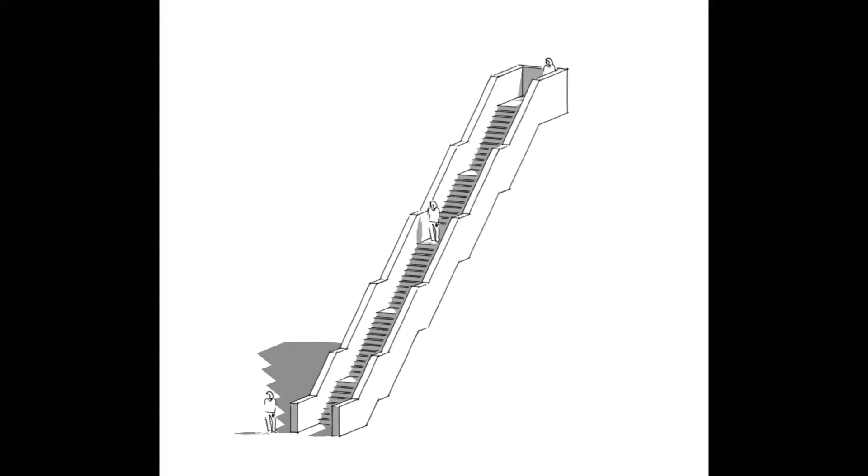So this is a statics case study revolving around finding an equivalent force couple system. This is the Vlooyberg Tower in Belgium. It was constructed in 2015, and it was built to provide a unique platform to give visitors a view of the town and surrounding forest.

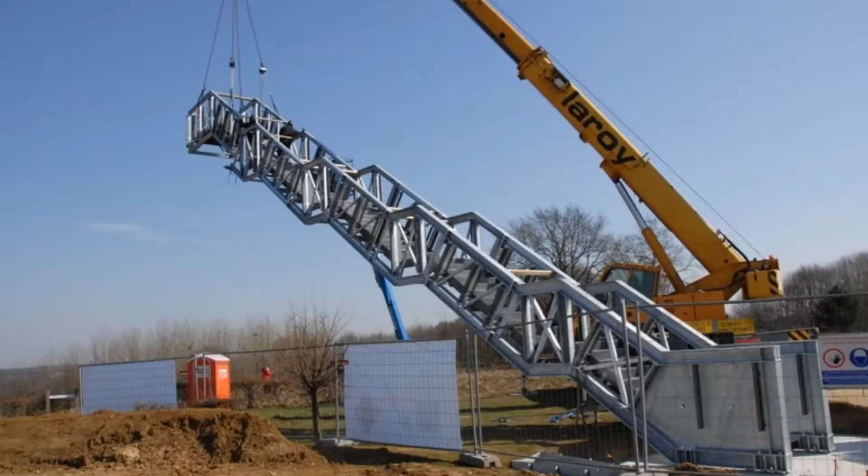It was designed by the Belgian engineering firm Close to Bone, and it actually replaces an old wooden lookout tower that was burned down. So the staircase and observation deck are supported by a structural steel frame covered in oxidizing weathered steel, which gives it an orange-reddish hue.

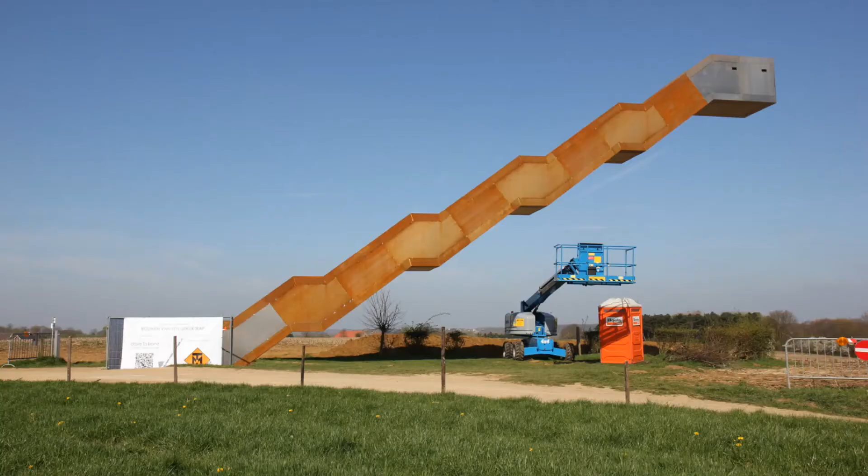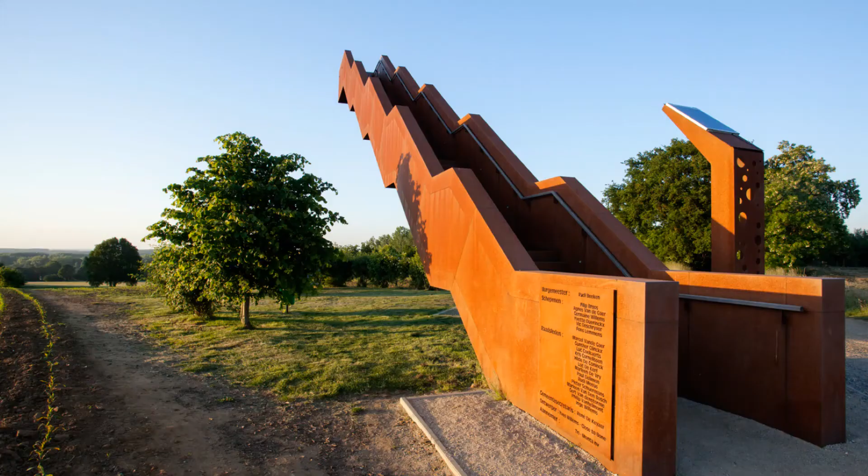The structure itself rises about 11.3 meters above the ground and weighs approximately 135 kilonewtons. The base of the tower is actually supported by two anchor points that prevent the structure from turning over, and that is the only source of support for the entire structure.

So in this statics case study, we're going to look at determining the equivalent force couple applied at the support that prevents uplift, so the support towards the rear of the tower. We will then use this equivalent force couple system to determine the forces acting on both of the supports.

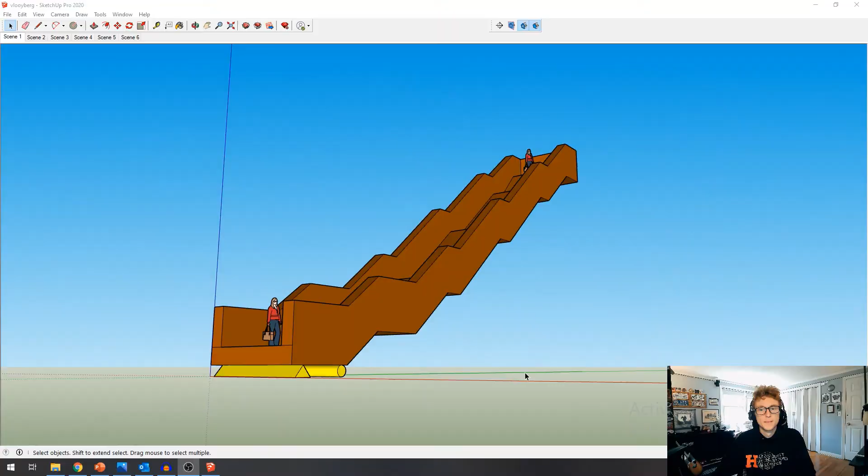So here I've made a simple model of the Vlooyberg Tower in SketchUp. We can see the average height of a person here at the base as well as at the top in order to show the scale of what we're dealing with. In order to solve this problem, we're going to have to make some assumptions, especially as it relates to the weight of the tower and the location that the weight is applied, so the center of mass, as well as the location of the reactions.

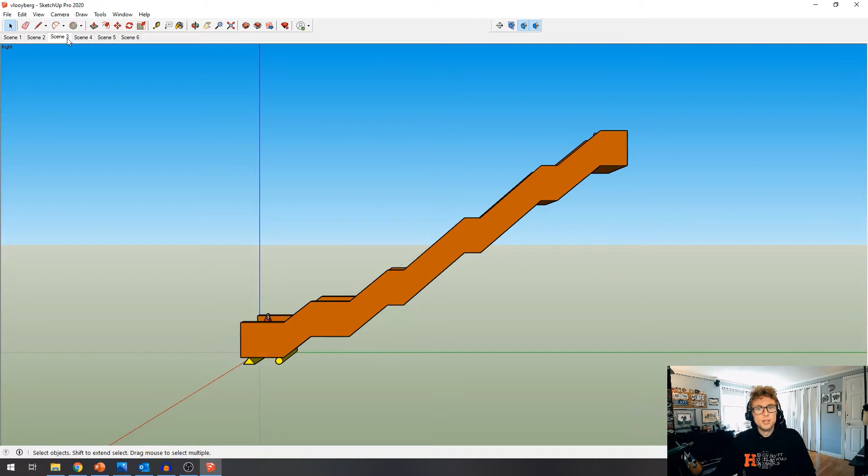So we're going to assume that the tower weighs 135 kilonewtons, and that's based mostly on the weight of the steel as well as the amount of steel that's used. We're going to assume that there are two reactions or two supports supporting the tower. So we have a pin at A and a roller at B.

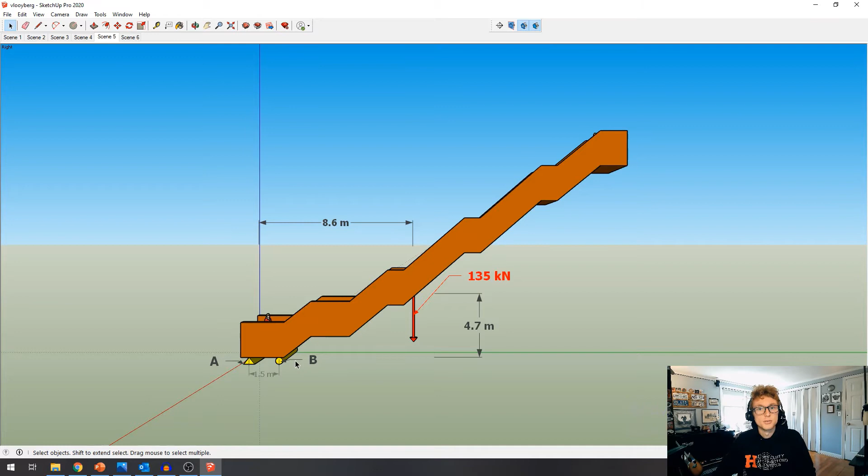We don't really need to be concerned too much with what a pin and roller means in this problem specifically. Basically, a pin can support a structure vertically as well as laterally, whereas a roller can only support a structure vertically. But really in this problem, we're only getting vertical supports from each reaction, so we don't really need to be concerned with that.

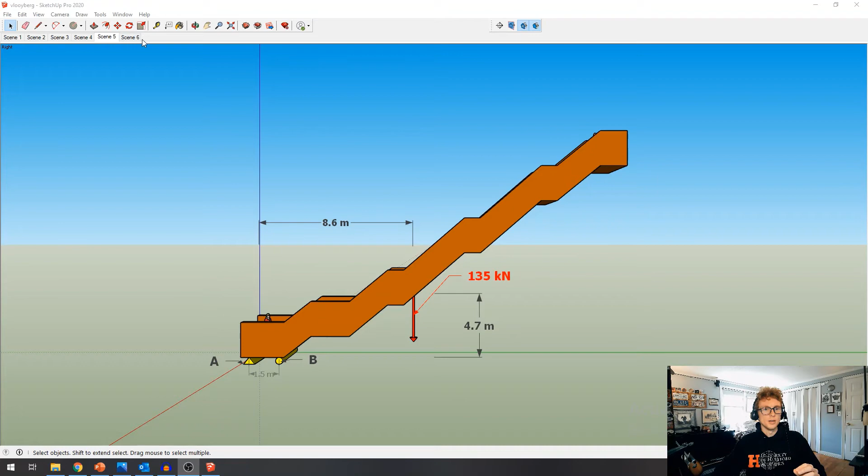So we also know that the weight is applied 8.6 meters away from A in the horizontal direction, as well as 4.7 meters above A and B in the vertical direction. So now that we know the loading, as well as the location of the loading, and these reactions, how they're 1.5 meters apart, the main point of this problem is we want to find the equivalent force couple system that this loading creates at A.

So we want to take the force that we just saw in the location we just saw and replace it entirely with a force couple system at A using the strategies that we learned today in class. Once we do that, we want to actually go from a force couple system and get rid of the couple and make it so that we know what the force is on each reaction. And we can do that by replacing the couple with a system of two forces based on the definition of a couple.

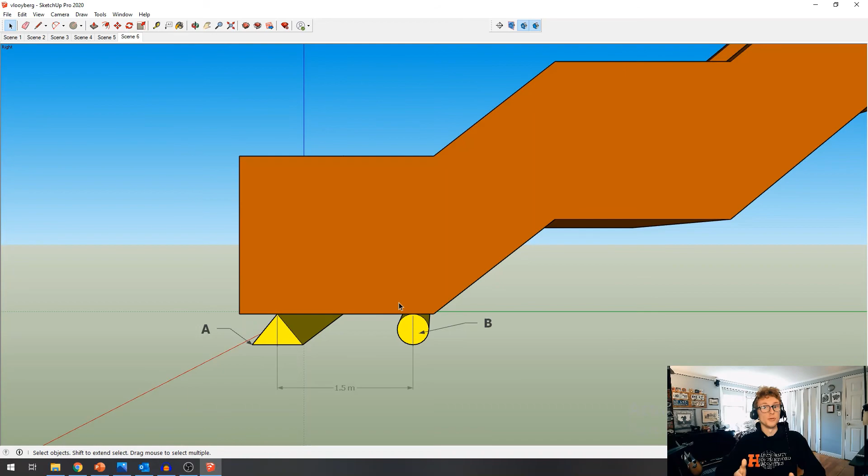So this is just a quick summary diagram showing the dimensions as well as the loading like we covered in this video, nothing new. You can pause here if you would like to try the problem yourself. And again, we want to find 1, the equivalent force couple system at A given this loading, and 2, the forces from the structure on A and B. And remember, a hint for number 2 is to use the result you get in number 1 as well as the definition of a couple to convert this force couple system to just two forces.

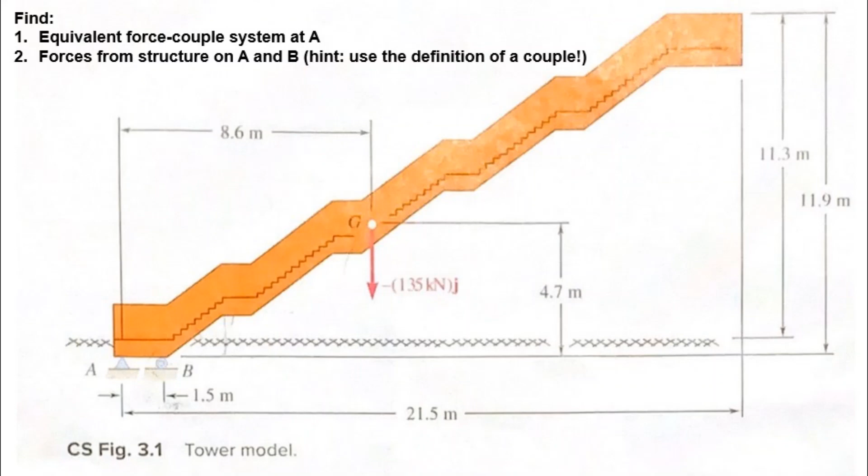And again, this case study comes from Beer Johnston, 12th edition. I did not come up with this. I just made the video showing a summary of the problem.